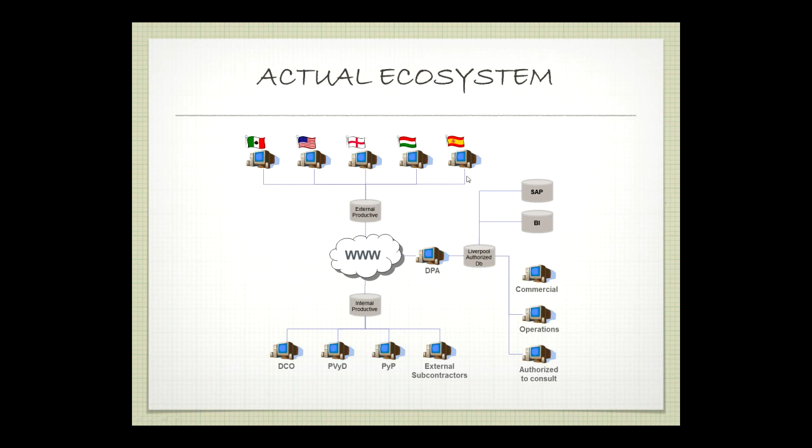Well, for today, the Liverpool Interlomas is our main theme. This was our flagship for 2012. It totals 319,000 square feet in 4 levels of department store, and it also has 4 levels for parking. It includes new concepts like the gourmet world and the human rooftop park, and because of the place in which it is constructed, the facade and the rooftop have a special design, because in this part of the city there are very few people who can walk around.

The main visuals that you always have, it's most of the time directly from a car.

For this project, we had the coordination for the entire project, but 4 companies worked with us at the same time. The one in charge of the interior architecture was FRCH from Cincinnati. For the architecture, all the facade and the internal main area in the center, was Rojkind Arquitectos from Mexico. For the interior design and the gourmet world was Lewis Moberly from London. And for the landscape, we had help from Balsley Associates.

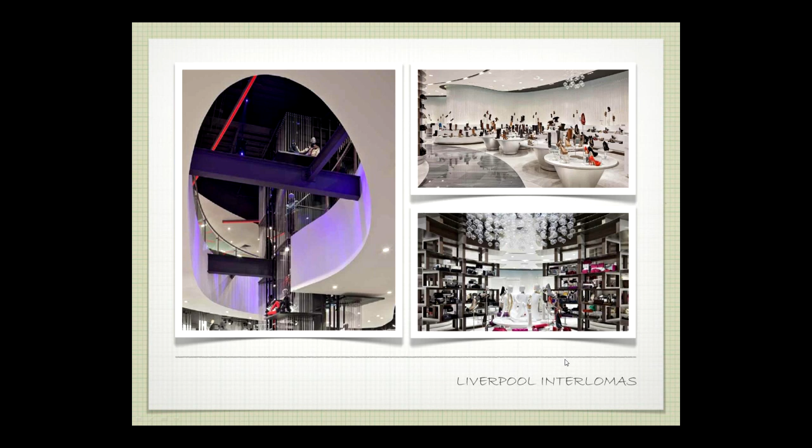And as you can see, these are very organic spaces, and we don't have any problem using ArchiCAD for this.

Well, this is only a main introduction for the project. I'm sure you could have other kinds of questions. I will be pleased to answer them in the future if you want. Thank you very much.

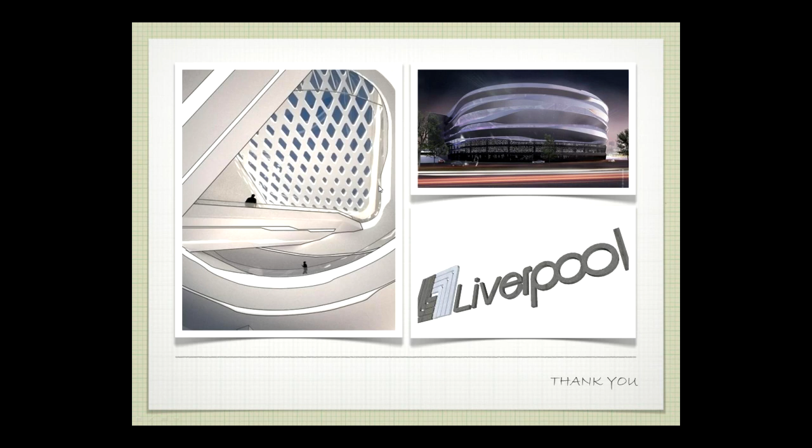Thank you, Fernando. That was eloquent, very well said. Thank you very much for your help and support. I think this is one way of showing how this works, and letting people know that the BIM approach is definitely the way to get all aspects of business involved, because it's a very rich database from which all kinds of actors can take information for their own purposes. Thank you again. Now let's have a look at what ArchiCAD Live can bring us for 16.

Prior to that, I just wanted to let you know that we're actually in collaboration with other people. As you know, Fernando was in Mexico. In Spain, we also have Xavi Ribas, who is in the north part of Spain, in Catalunya. Javier Farratelli is also down south in Seville. And then we have Pablo Gomez, as well as Diego and Paulo Alves in Valencia. Here in Madrid, myself and Jose Juan.

So you will see the collaboration of this work being done live into an actual project, which is going to be the Lomas project, Inter Lomas project, to show the different aspects of ArchiCAD as far as version 16 is concerned, and the new cloud systems that we have for our users.

This is one of the floor plans that we currently have for the Inter Lomas project. As you can see, it's a fairly well interesting area. Now we can actually see the elevations. Those elevations are live, by the way - they're not just elements that you see all over the place, they're in fact building products, building elements that you're going to see taking place. As it is a working project at the moment, at the same time we're having different assistants working through it.

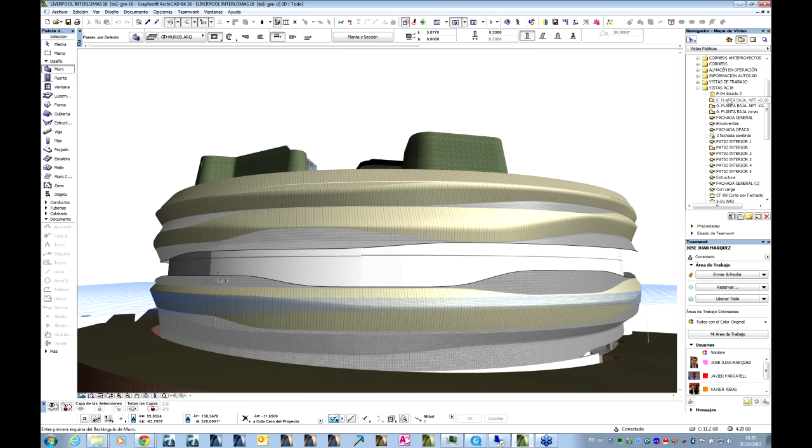And you can see it is a very interesting as well as organic facade. It's meant for those traveling at very large speeds around the site to see it quickly and have an impact.

And here we go, we're going to go into it. So currently these views that we have here will now be shared by the parts of the group. We can see them at the bottom right hand corner of your screen - Jose Juan, Javier, and Xavi, they have different colors. Right now on the screen we can see the blue color, meaning that no one has actually accessed it, and it's free to be accessed, so you can actually select each of these elements.

We're going to see how these elements get selected by the different people. In this case, Jose is going to take all the walls, Xavi is going to take all the columns, and Javier is going to be taking the main grid lines for the structure.

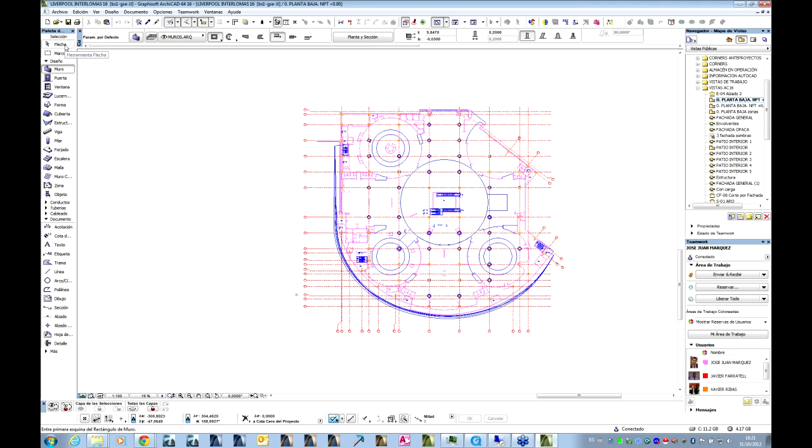So now we see different colors here. The pinkish colors are for Jose, the yellow or orangey are for Xavi, and the rest, which is the structural grid, is for Javier.

So now we're going to have a look at this in 3D and see how it all looks. You can see we've selected all of it. It's live currently, we're simply regenerating at the moment, and you can see there all the areas.

Blue is significant because it has not been selected at this stage, but you can see the columns already, and you can see the walls with different colors.

Right now they're going to be selecting all the reservations, and some messaging is going to take place, like right now in the case of Javier or Xavi Ribas. They're asking for information so that they can actually select their elements that they want to work with.

This sort of information happens to be on the fly. You're taken directly to the area where Xavi's asking for information, because in a large project you don't know where it might be, so you're taken directly to it.

This internal messaging system is live. It allows you to collaborate in real time, and as you can see, it takes very little time to go across. We could simply release it by tapping a button, and it's no longer part of Jose Juan's system, but it will be part of Xavi's system, so he should be able to continue to work.

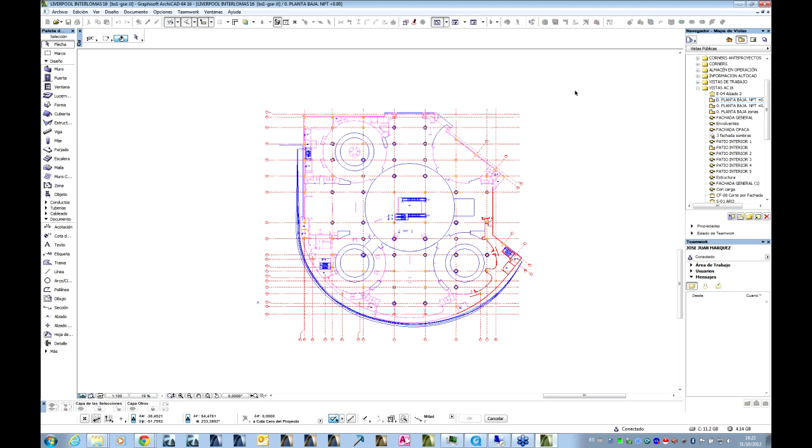As you can see, some areas now have different colors for the walls, and our different assistants are now taking care of their part by selecting and acquiring those elements they require for their work.

We once more see it in 3D just to make it more obvious, and you can see clearly that these elements are being selected as we can see.

Now some walls have turned to red, which is Xavi's, and some elements to Javier, and some elements again in walls and others have also gone to Xavi.

They clearly show who they're from if you put the cursor next to it, and we know exactly who works on what. This is a very important system that allows us to work in conjunction, in collaboration, without having problems of coordination or having any kind of double-doing up and corrupting the database.

Very important. Okay, here we have, this is our part that we're going to be doing, and in fact we're going to be using the new tool Morph. With this new tool we're going to fill in the gap that you see there.

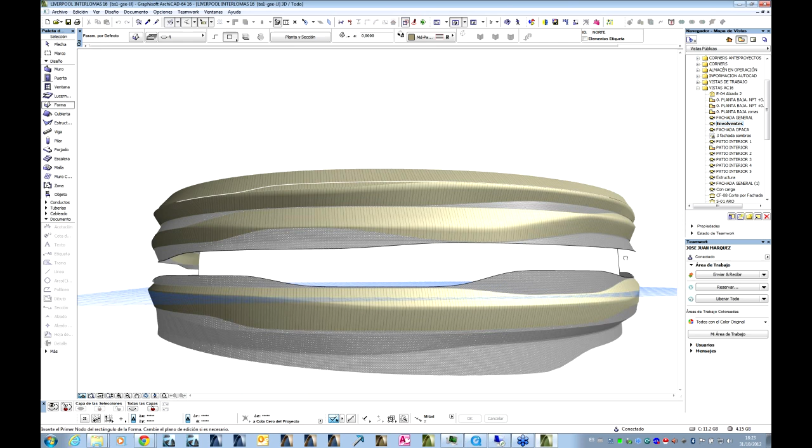Currently you're able to do this because ArchiCAD allows you to put 3D line work in place. That's going to give you a guidance for the new form. It's in the wrong layer, but it doesn't matter, so we just switch it on, and the Morph system starts working. As you can see, it checked out all the line work, and then with these edges generated the form that we see here. It's quite nifty.

As you can see, it allows you to go from the macro, which is in this case the building, towards the micro, which we'll show later on for the furnishing of some parts of the store.

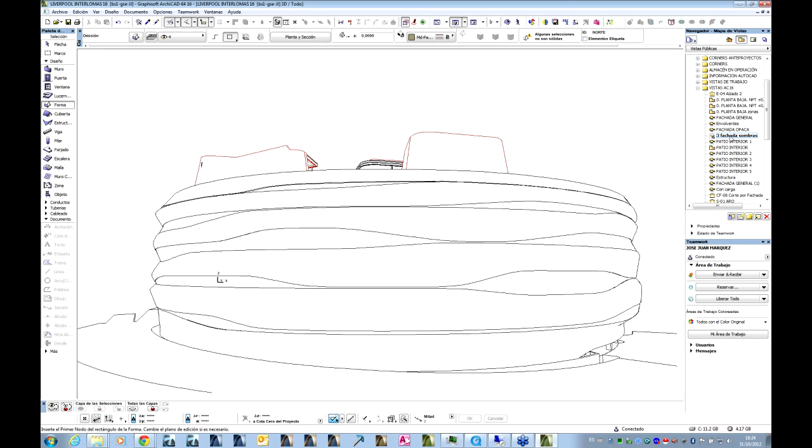They're real, they're like we have built it. We can see it in different colors, as you can see for this representation. So it is, after all, an architectural representation.

It's not just a mechanical one. We're able to select how and which way we see it, but we can always work in every part of the database, that is, in all the windows, be that 3D, sections, elevations, and details.

This is a 3D element, and in fact it's going to show right now that they are real. You can see there it has some form of information because it is an intelligent object, and again we will see other areas of the building so that you can get more acquainted with the interior of this retail store.

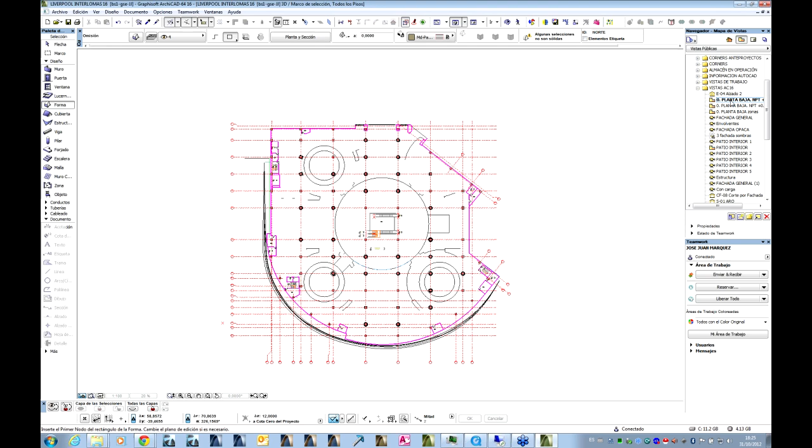At the moment we're going to see the well that takes up all the vertical circulation, all these escalators that we have there, and further views beyond, just to give us an idea of the complexity of the building internally and how easily it's able to be provided with the system that Graphisoft has done with ArchiCAD.

You can see very well that all these different people have actually got information. They can send and receive all the elements that they wish to. All the colors have been assigned, and what we're going to do is acquire all the information. This is going to take about 30 seconds at most.

We have to remember that the server is currently located in Paris, that we're working from Madrid in conjunction with different people around Spain, and that we're able to get all this information across to you live via internet. So the system has to be very efficient, very fast.

And here you are. You're able to see all the changes taking place, all the new things that have been added, all the additional information that has been done. And here we have a report from our different assistants and collaborators saying that they've done their job. So you can imagine, as a main executive officer or the person in charge of the project, you know exactly how far things are going along.

But of course, this is all well and good. We have all this information that appears to be as in 2D, but in fact we need to be able to collaborate with other assistants or collaborators or consultants. In this case, we will be looking at how this turns into structure.

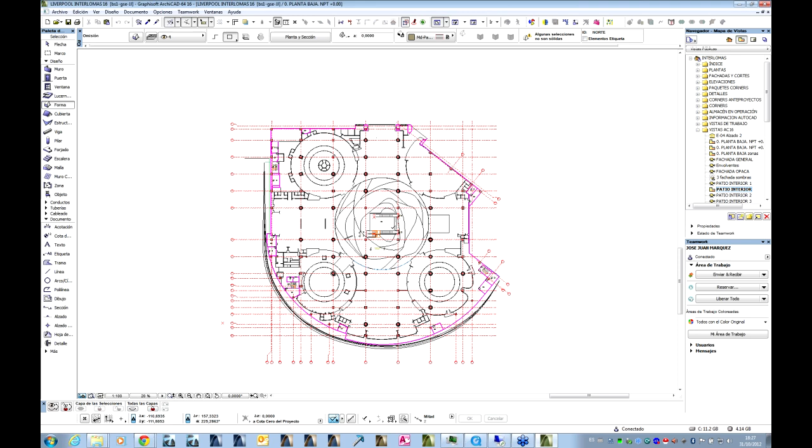In order to get a collaboration done, we will have to start thinking about other consultants. We're looking at the moment at the wells from a plan view, and now we see it again from a 3D point of view. But the interest here is not these two images, but what comes next. What comes next is going to be the structure of the entire building, which is going to allow us to view it from a different point of view.

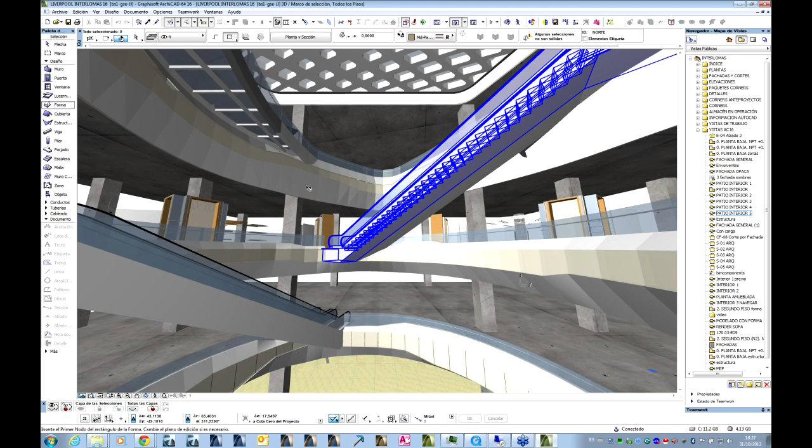Different users or different agents involved in the production of the project have different needs. And here's where OpenBIM, with its inclusive system of support in terms of exchange of information, can allow us to connect with our different consultants or collaborators, be that of any kind. As you saw from the ecosystem in terms of Liverpool, they actually have it even dumped into their SAP ERP.

Each of these elements, as you can see being highlighted, are construction elements. Even if these elements had been done in a different system, we're able to import them into ArchiCAD and then further work on them so that we can continue to modify or change them. Therefore, it's very flexible.

And here we are. We have the structural componentry of the building. What we have to tell it, though, is what it is that we want to send to our engineers. It is quite important to ensure that we send them the correct information so that they don't waste time, and there's no redundant elements that they don't require.

So we're going to specify in this area what sort of elements are taking loads, so that they're actually what they want and not just some fancy 3D geometry that is not required.

Once we have done this, we will then be saving this as an IFC file. IFC, as you probably know, is the Industry Foundation Class System. It is important to note that it's universal, it belongs to no one, and the beauty about it is that it's a simple file system. It's in fact a text file that picks up all the information relevant to the BIM model, not just its geometry but all its cleverness in terms of what it does.

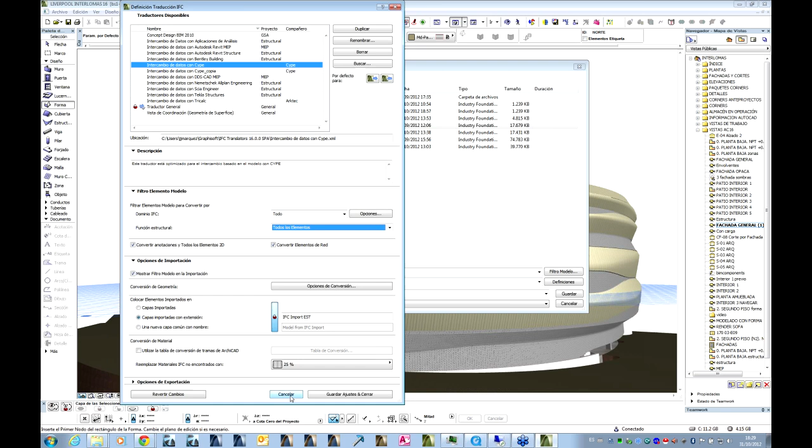We're able to save this by selecting the elements that we need, and at the same time using translators that we already have in Graphisoft for different software vendors. In this case, we're going to be sending this to CYPE Engineers, and the beauty about it is that all of this can be worked out so that the protocols in terms of information exchange are clearly defined for all kinds of elements.

We're able to then ensure that what we have is information that is valid. But when we produce these drawings and sections, because after all this is what we issue to site, we note here that most of the elements are intelligent in terms of being able to clean up. They do not double up in information listings or quantity takeouts because it's clever enough to know that it's inserted into some other element. You can see also that the envelope here has actually been cut correctly.

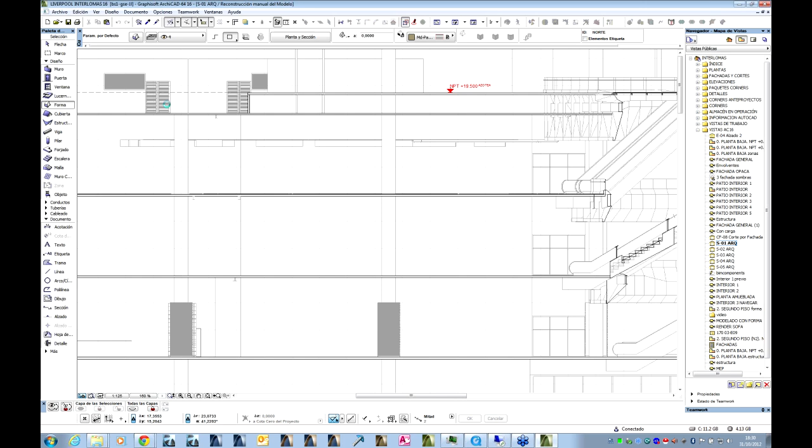It actually joins very well. Elements such as escalators or stairs are clearly defined.

That's going to save us a lot of time in drafting. In fact, we do not draft anymore. We take this information directly from the model and simply add further information as we need, whether details from the manufacturer, or 2D information referring to text or dimensions. But as you can see, we don't need to draft.

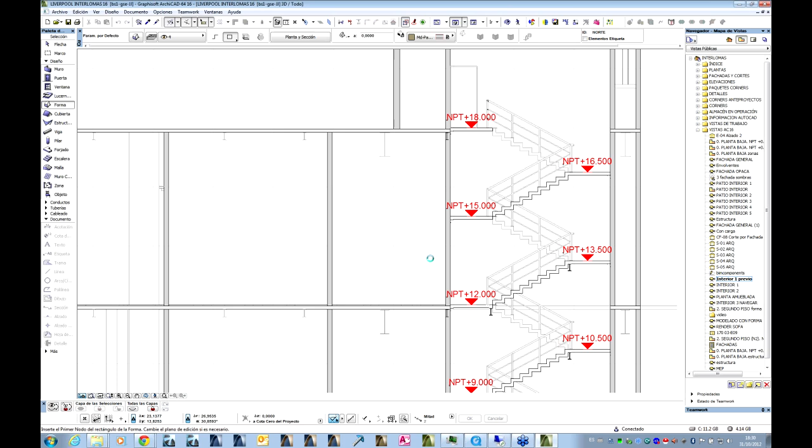These are real elements, we're actually building them. All the cleverness in terms of having the levels, the elements, and being able to list them out is all in there. It can be used for any kind of simulation, which we'll see with CYPE Engineers, even for fire engineering, to check how an evacuation system will work should we have a fire developing.

But this is the beauty of BIM. We're able to have a lot of information that different people will require, and it's not always the same.

Here we are on the second story level, which has been furnished for the purposes of this presentation, and some joinery elements have been put in place. We're trying to show you some information, but unfortunately the internet is a little slow. Nonetheless, you can see from an overhead point of view the way the story has been shared into three main nuclei around the main core of the vertical elements, and that will let us show you how we can travel through this building or floor for many reasons.

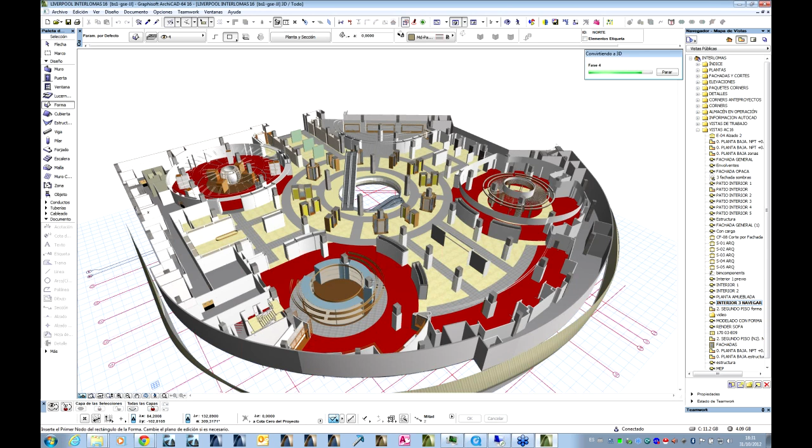We're able to understand how the shopping mix is done in terms of retail expert. We're able to get salespeople involved in how to best display their information or take advantage of this for their clients. We're able to do marketing from this. We're even able to share this information for building groups, for clients, or for us ourselves to analyze and study.

Now, this is within ArchiCAD, but of course we're able to do so through BIMX. BIMX is that particular tool, which resides in the cloud as well, that allows us to package information in one single executable file that can be used by either Macintosh or Windows.

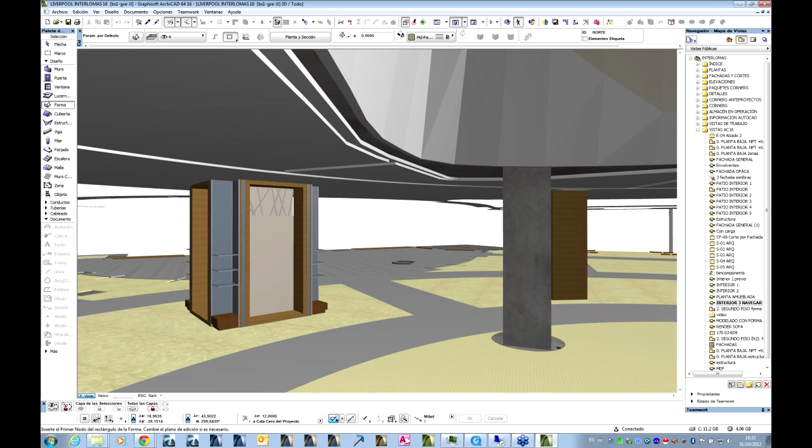It's able to give us intelligent information that we can query, measure, check. This is interesting because if we send this information, it can be modified later on and simply sent back if needed, in case we're going in a development mode with the project, and that is at any stage.

So here we are, we're going into the area we're looking for, just to show you from a micro point of view what the actual element does in terms of morph.

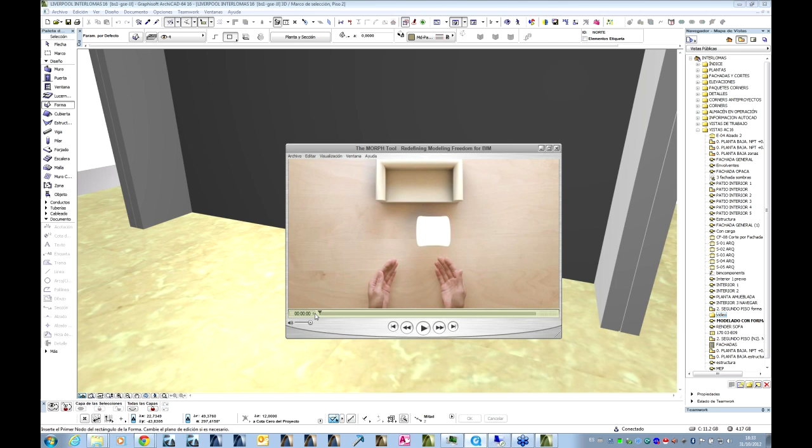Before we show you how this works, we're going to take you into a video. That video will show you the essence of what we're trying to do. This is purely from a show point of view, but what we're trying to demonstrate is how it actually works within ArchiCAD. This is the premiere of it. We want to show that it works such that it's simple, intuitive, makes sense, and is something we're used to.

So here we are, we see somebody drawing a little shape. In this case, it could be the size of a sofa. It is a curved block that can then be changed into whichever way we want, because we have some auxiliary systems to help us push or pull areas or polygons within that block, much like SketchUp or within ArchiCAD.

And of course, we end up at the end of the day with an object that is in fact intelligent, a BIM element. These extrusions have been made around the backrest of the sofa, and then we continue on so that we're able to get another shape representative of the cushions placed on the sofa, both the sitting and the backrest.

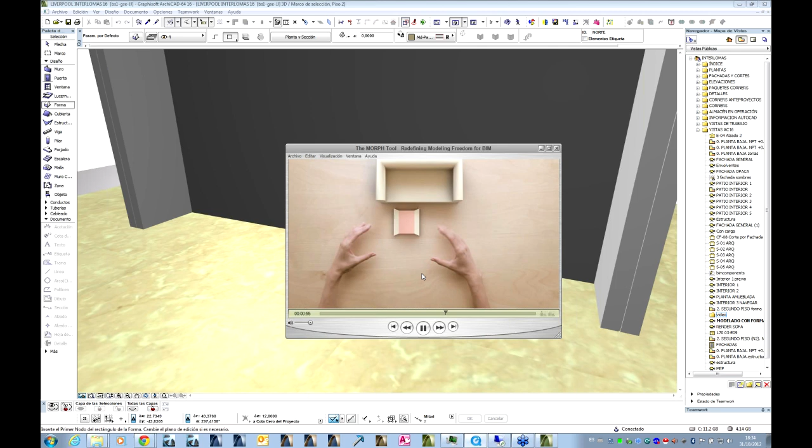And as you can see, again the same process with some auxiliary elements, some ways of changing it so it becomes a double-edged system, so there's no reason we cannot have double-curved elements as shown right now. The copying of it is simple enough, the idea of being able to copy this and then shift it in terms of its rotation, but it has to be simple. So this is the principle of it.

This is something that we'd really like to say that we have actually captured. At the end of the day, this has to be shown somehow, and we can select a number of textures, or finishes, that can actually be applied to the sofa at the end. And this is the end result.

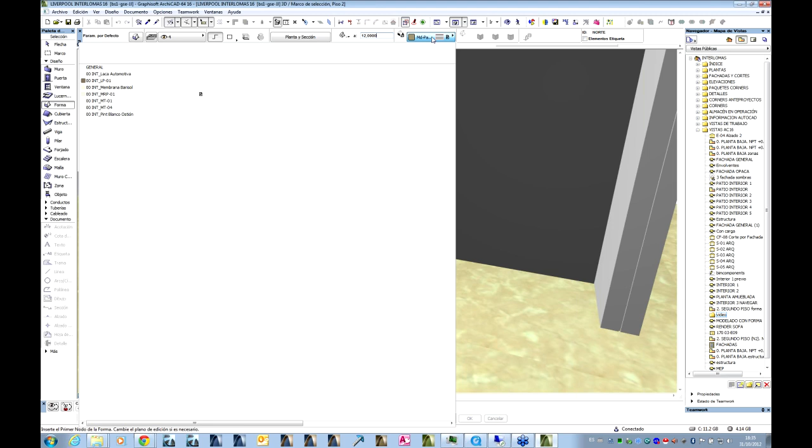Our intention here is to show you something similar to what you have already seen, more than anything, so that you can understand that what we put in that video is in fact true. We're going to be selecting some materials first of all, just to make it more visible.

We're going to be describing the base of that sofa through a polygon that you can see being represented right now. The beauty about it is that you can see some pet palettes. The pet palettes that follow the cursor, or actually stay very clearly in front of you on the screen, allow you to do all kinds of editing, including precising and mentioning any kind of distances that you require.

Here we have isolated it so it's easier to see, and we're going to start, as you can see, from the top in the middle of the pet palette, being able to modify this by pushing it up a certain distance that we already know is about 70 centimeters.

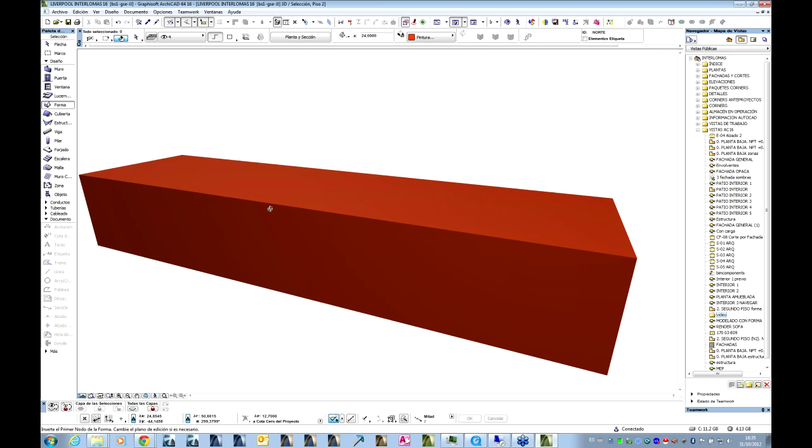We're then going to be able to get some divisions within any of the edges, so that it helps us. We're going to pull out, if you like, an auxiliary line. That's simply going to help us define an internal polygon that you can see here.

Now the intention is that we can then push that polygon eventually and create, if you like, the main carcass of the sofa.

So we have two main side lines. We're going to get the rear line at the moment. As you can see, there are some divisions being made there because we wish it to, so it makes it easier for us to do it quickly.

This is the beauty about ArchiCAD. Whilst you're doing something, there's no changing of commands, there's no changing of program. You simply continue working on the fly.

Here we are, we have described another element which is going to push down a certain distance, which we already know, and the intention here is to create that carcass that we're talking about. Here's the base. So we have finally finished the base within the last few seconds, and at this stage we're going to start thinking about the backrest.

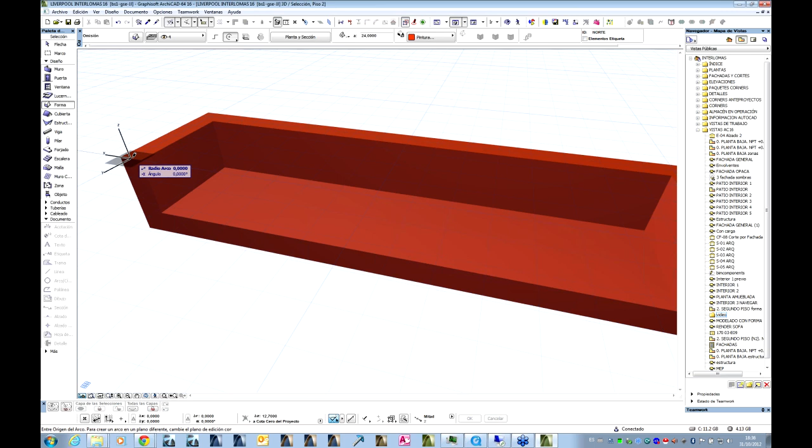The backrest is made again by pushing out another polygon. This polygon happens to be a circle, in fact, and it is easy to shape it and to turn it.

As you can see, it is intelligent enough with the cursor so that we have information on the fly helping us navigate, at the same time being able to change points or locations so that we can extrude and move along with no problems. Here we are, we're changing at the moment the height of it so that it's easier to push it along that edge.

We're then selecting a point from which we're going to be able to extrude it right along the edges of the backrest of the sofa.

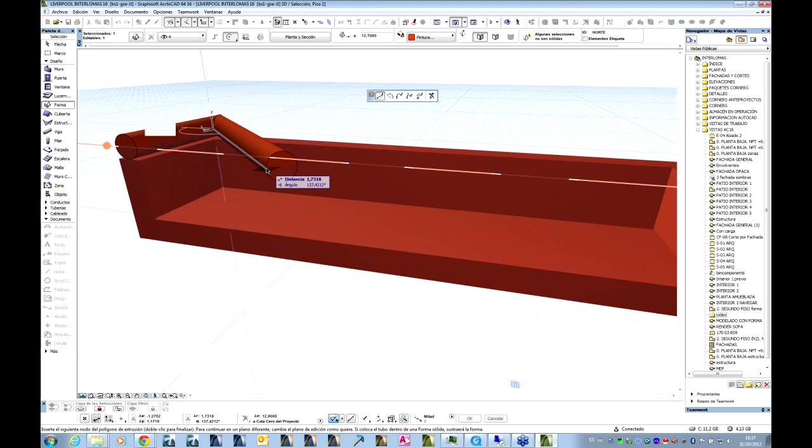And here we go. We already see the first part being made. The second part will shortly be done. It's a little slow here on the internet. That's okay. And again, we come back and we finalize this shape.

Now that we have that extrusion, we will simply put it in place so that it actually looks like the sofa that we want to see. Here we are. It's in position.

Now obviously with morph you can have many elements, or you can make many elements one element, and this is something that we're doing at the moment. But the beauty about it is that it's still only one element. It has taken out whatever is excess. So as it is now being highlighted, you will probably see that it's all one element. Again, for takeoffs this is extremely important because we don't want doubling up of measurements in terms of quantities.

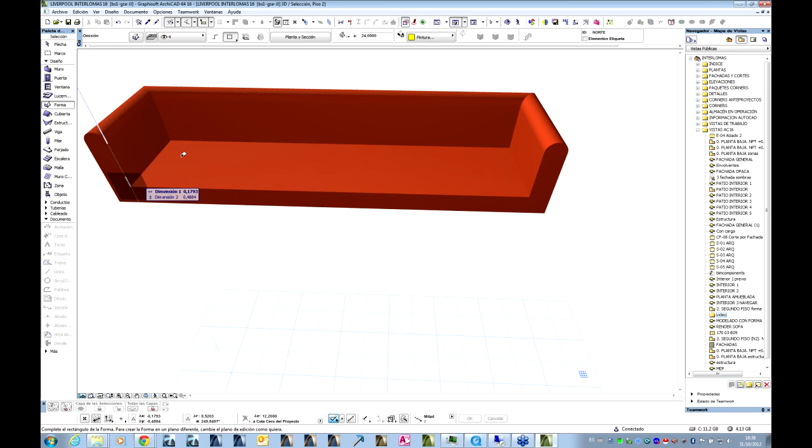What we're going to do now is simply place down the first of the cushions. Because we have already divided in here into 4 places, we know that it fits 4, because that's what we selected. There's the element there. We're going to push it out so that we can have a better look at it and be able to work with it. It comes out in a second. And beyond that, we're going to start thinking about softening that polygon so that it looks like a cushion.

As you know, cushions tend to be soft and have different curvatures, and this is where the game comes in. We no longer have to construct something in a mesh, which becomes very difficult to handle. The 3D aspect of producing this is very simple because we have a lot of online help. The roundness can be suggested in terms of smaller segments, so we have a better curve, and beyond that we can extrude it so we can have a cushion the size we wish.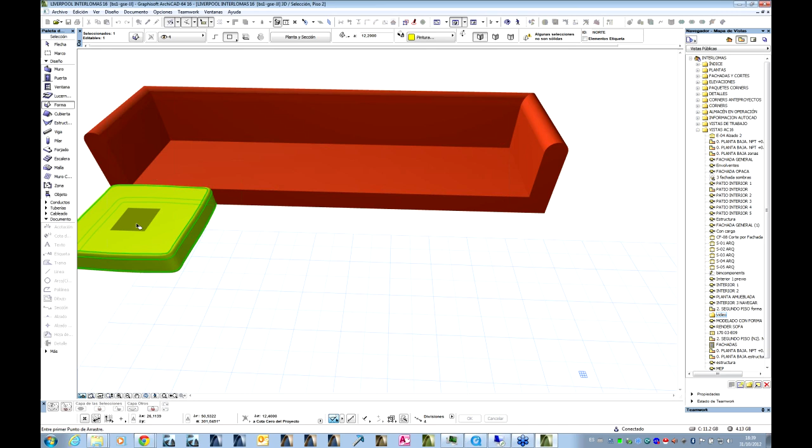Once we've done that, the chamfering of all edges can be done so that we have a double curve, both horizontal and vertical, and here we've selected just a simple curve. Once we've done that, we can push it back into position, just shy of the back.

The reason for that is we want to copy this cushion as the backrest for our sofa. These systems we currently have, as you can see with the protractor being shown, allow us very quickly and simply to relocate it in the position we need and locate the point of fulcrum, or in terms of rotation, and then be able to copy this seater to the rest, or the backrest.

At the moment the internet is a little bit slow, but we'll get over it. Here we are.

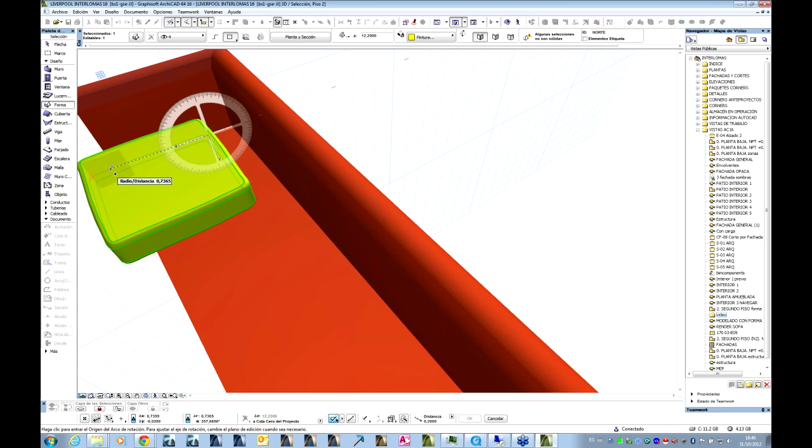We have already curved it, and we selected it and simply shifted it across that axis, and as a copy we have these two elements.

Now the backrest has to have further shaping, and we're just going to shape the top of it a bit so that we can give it this cushion look rather than just a solid, as we currently have, so it looks a little fluffier. At the same time, we're going to push out a bit of those surfaces to give it some depth. We can do as much as we want, but we really want to do this in a measured way, so we'll select a distance that we want. And again, we'll do the same for the seater.

It's very, very versatile. We can shape it much like we were doing anything organic. It's going to let us remorph anything we like.

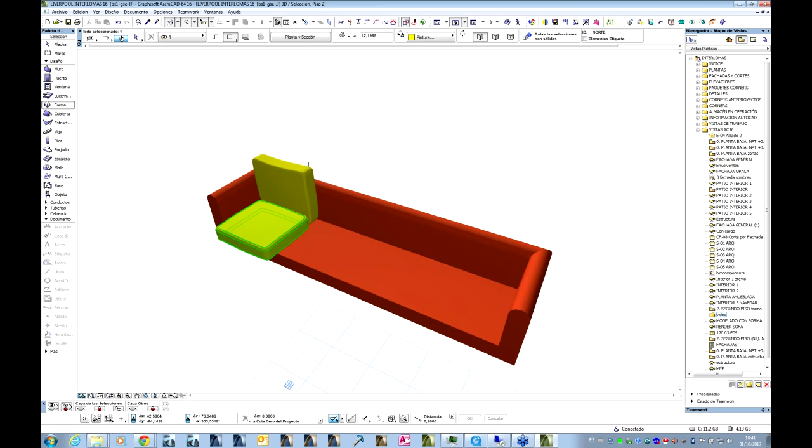Once we have these in position, we can copy them across with a very simple system, as you can see, and just set the number of copies done across the element. We're going to do 3 elements across a certain distance, and when they're correctly divided, here we are - we have the 3 additional seating cushions done.

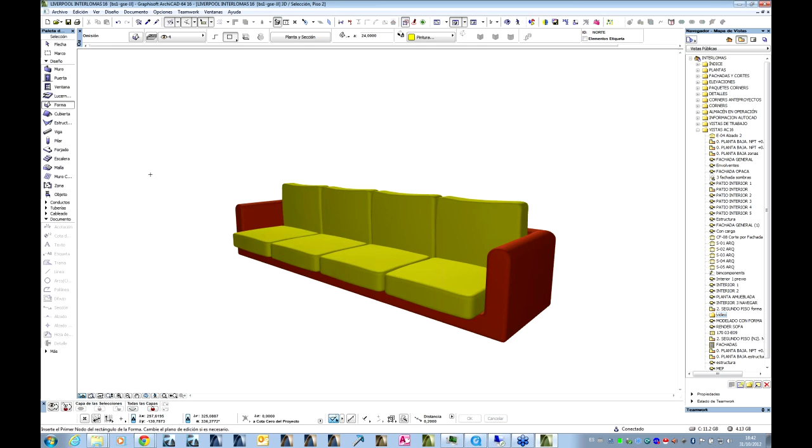Once we've selected all of this, the carcass can also be turned a little bit. It's a bit harsh on the edges, so we're going to chamfer all of those edges to make it look a little more comfortable, as if it had been cushioned. This is again done simply with the click of a button, so we can get our information across. See, it's already been done, it's been taken care of, and it looks rather nifty.

Now, of course, this is simply a color scheme we have here to make sure we see the differences. What we need to do now is give it a finish.

We can select a number of materials. Here you go - in this situation it's a cloth material that can be placed in the location where we want it, because remember, we actually cleared it out so we could see it better. And we can even render it so we know that it looks okay.

This render is going to be useful for us later on to show you how the BIM components portal works in terms of uploading this information that can be shared with either consultants we have or the public at large, or we can even be nifty enough to start producing these elements for manufacturers who can then have their wares exposed in this community portal.

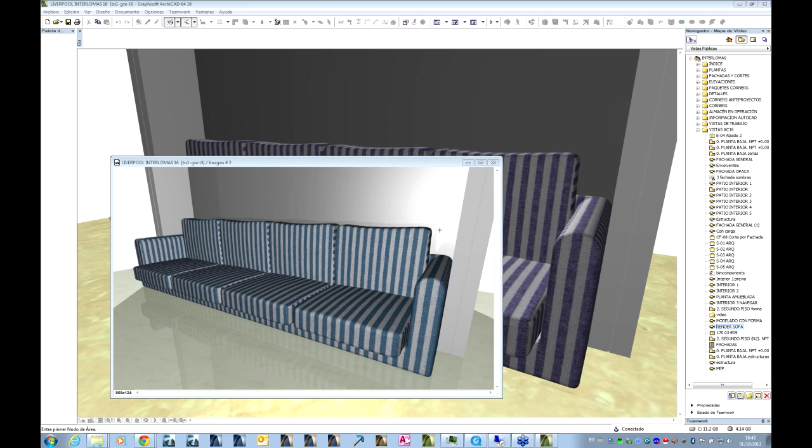We're going to start thinking about collaborating with engineers. For that, I need to first go through, like we did with the video, the steps that we take and why it is that we've done what we've done. It's very important, because we need to ensure there is a smooth workflow structure, that it is applicable to everybody, and that it is platform independent.

So the first thing we have done is create the architectural model. Here, we've done it with ArchiCAD. Beyond that, we've actually filtered and classified the model. In this case, it's going to be for the engineer in terms of structure. We then export this architectural model as an IFC file for him to pick up.

Once we have selected the file from him that is being worked on, we can reference his model onto ours. The reason is simple: there's proprietary work taking place here, and there's also liabilities that we have to work out for, and nobody wants to have their model touched. This way we're able to systematically check for coordination and ensure manipulation of changes so that we don't get lost. At the end of it, we can also coordinate all of these elements within the architectural flow.

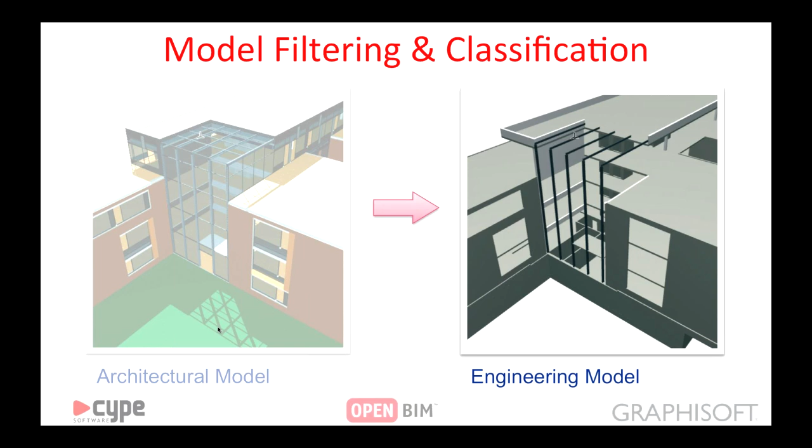It's interesting to note that different actors or agents within the process of construction, or using the building, see things differently. In this case, the engineers do not see the same as the architects do. What they see are elements that take structure, that need to be calculated, and that are going to be supporting the building. So we have to take into account how everybody else sees that central database. It's important to understand that the reference model is going to join these two, so that we are able to understand what each of them sees, but at the same time it interfaces clearly with what the architectural intent is.

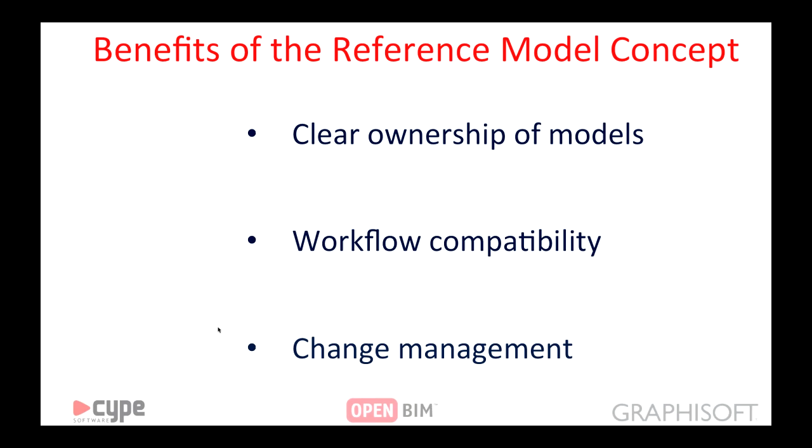Beyond that, we have to clarify what the benefits are in doing this. As I said before, there's clear ownership. It's important to see that everybody knows where they stand, that there's no messing about with their model, and that their liabilities are clearly explained. The workflow compatibility is maximum because there's only one system, one file that everybody picks depending on what they need from that central database. At the same time, change management is very effective. All of this gets recorded, obeying ISO 9001, because beyond now, we will probably have to ensure that everything we've done gets recorded for later use in terms of management information and data management.

So here we go. Some people described IFC as just simply a container of information that's dull, that has no need, just a repository, when in fact it is a better system. It's a system that, with some intelligence from Graphisoft, is able to let us know all the elements that have actually been added, deleted, or modified, and this doesn't necessarily mean structure, it could be anything else. So this framework has to be required and remembered, that everybody is well introduced, that the protocols of exchange of information are clearly stated, and therefore we will have a successful project at the end of the day.

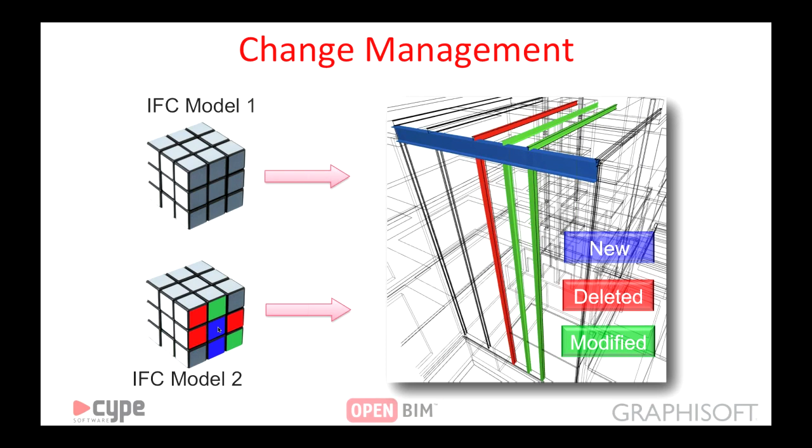At this stage, I'm going to start talking about the actual demo. We're going to switch over to CYPE, and CYPE at the moment will be picking it up, so it's all over to you guys. Please explain to us how you work and how things take on.

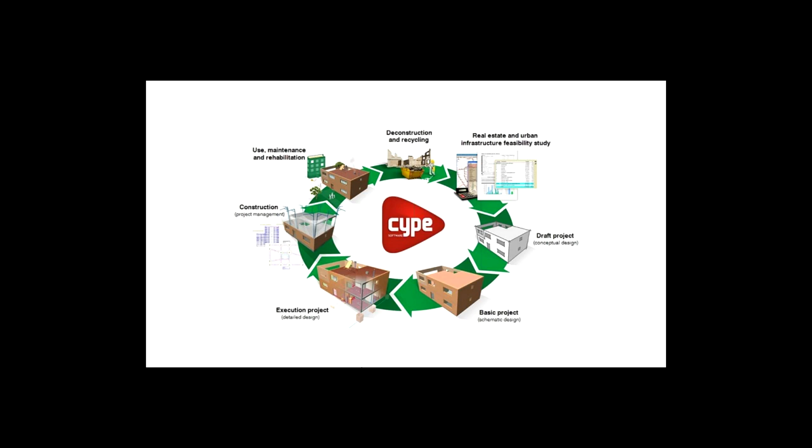Now, with this graphic, we can see the lifecycle of the building. Around this process, we can use our software in any case, so we come in at any state of the building. Right now, as you know, we are an open BIM environment. We are going to use part of the information from ArchiCAD in our programs CYPE.

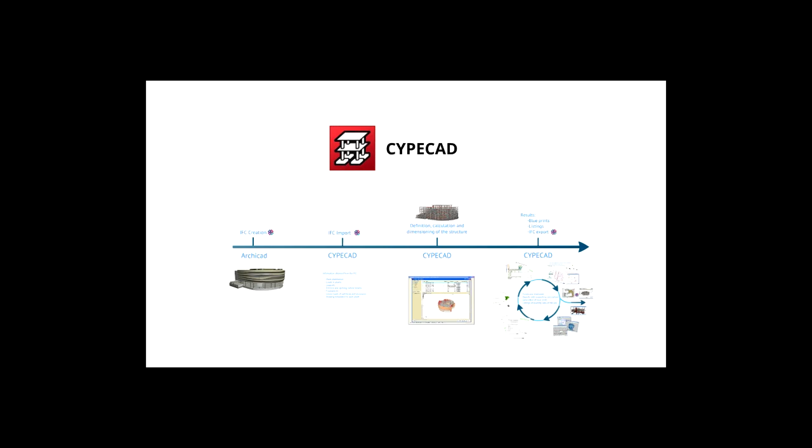Now, in our program, I like to always talk about the software, because any software consists of 4 parts. The first part is the import, the second part is the introduction of all the elements of the structure, for which we are going to use the 3D format. Then we're going to do the analysis. Finally, the last step is going to be the calculations, job reports, and drawings. I'd like to mention that not so many software around the world do these 4 parts, especially the drawing—with just one click, you can get all the drawings from any kind of element of the structure.

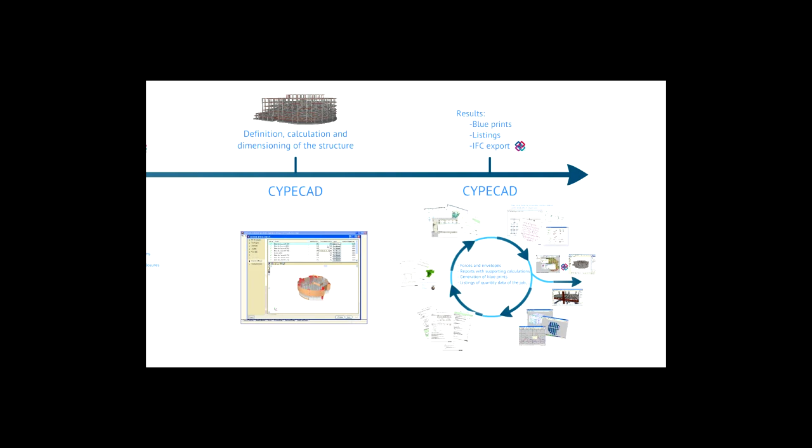Now we're going to see part of the introduction of one of the single projects. We are going to import the 3D format, a 3D view.

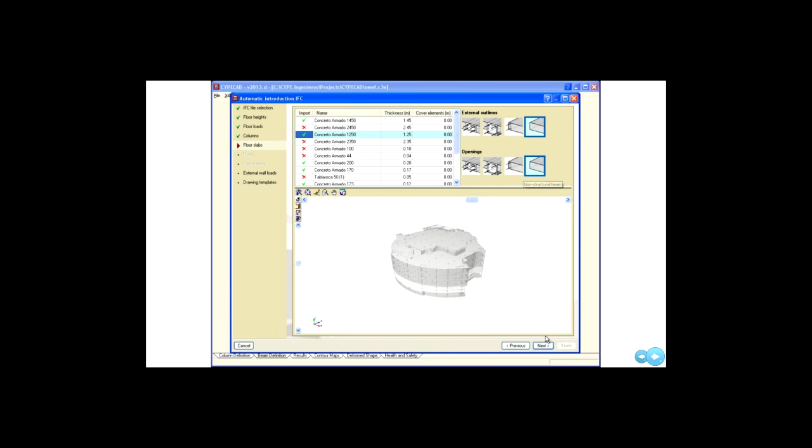So this is the external walls. Now, finally, we're going to do the building codes. We are located in Mexico right now, so we're going to do it for Mexico. After that, we're going to do the wind load for Mexico.

We pass into the tributary width in X and Y, and then the seismic load. Again, we go back to Mexico. I'm going to introduce the number mode. We run 3 by floor. In this case, I'm going to set it to 30.

And then we can see the 3D view of the entire building. Now I'm going to show you, we can travel around the floors. Now I'm going to show you just how to generate small elements like a beam on that part of the building. It's going to be a metallic one.

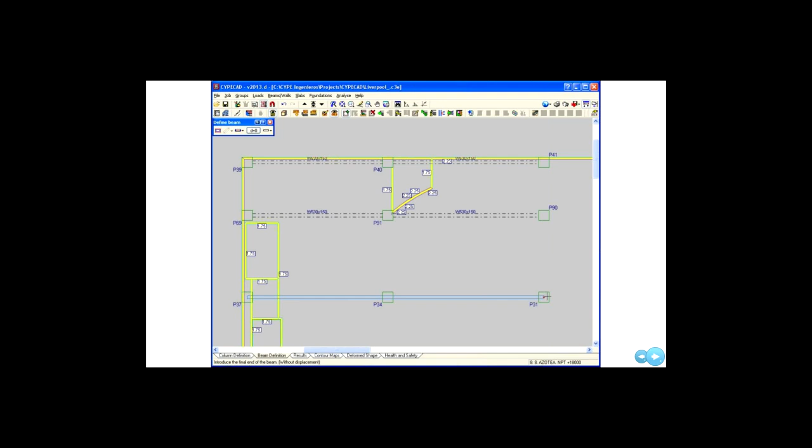We can also choose one from our library, and you can create your own library. In this case, we're going to do the W and different profile. We go column by column, and later on I'm going to introduce and activate one of the DXF files to help me finish the job.

And then we are going to do the slabs. In this particular case, we are going to do the steel deck. We can create our own library here too. Once we finish with that, we can run the analysis. One more time, the 3D view.

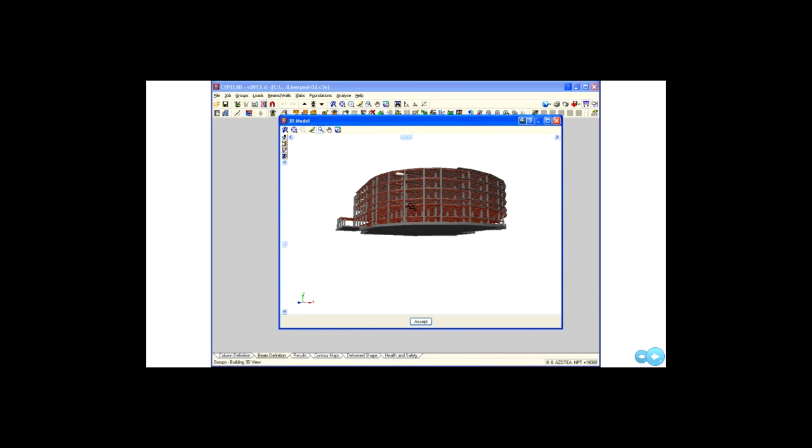Now we can select the materials. In this case, the concrete and steel. You can see the differences between one another: that's the metallic one and the concrete. Now the analysis.

This is the column editor, our column editor. We can generate reports about all the columns. These are the drawings: joints, stair walls, and one more time we can generate these for ArchiCAD. I'm sorry. You see the quality of this importation is really nice.

And now we are going to talk a little bit about the program CYPECAD MEP. We can do this program in Spain. If you are located in Spain or in Europe, you can do electricity, light, heating, acoustics, all of them. But little by little, we're going to introduce some of these programs in South America especially. I know that in some countries we can do gas, fire, and acoustics.

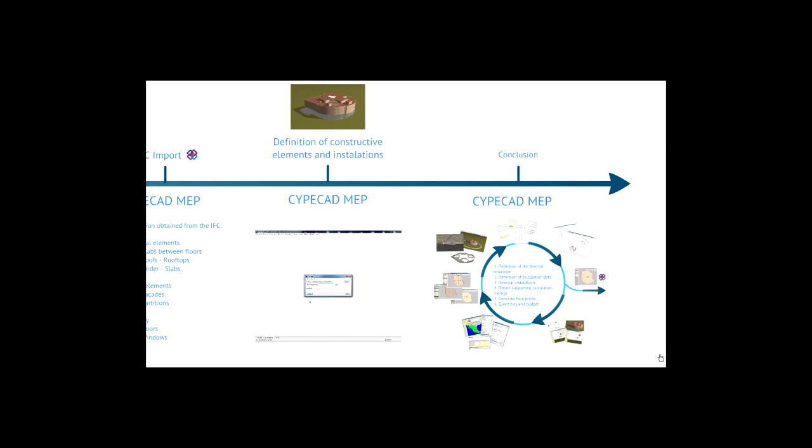Okay, once more. We are going to introduce the IFC format. In that format, we can recognize the horizontal elements and the vertical elements. This is a way to introduce one job into our software. We give the reference, we can choose the air conditions, and now we're importing the template into our program, the 3D view of the structure.

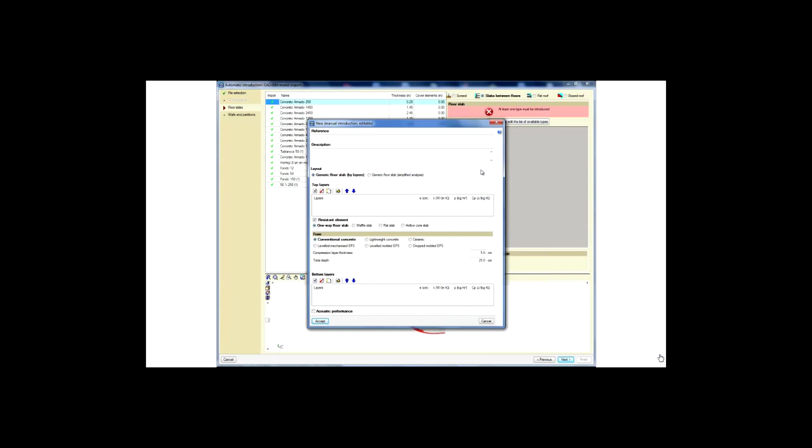And now we're going to do the floor slab. You can do it with generic ones, but you can also use our libraries. We're selecting one of them for floor slabs, even for internal walls and external walls.

Then the type of the building: it's a commercial area, a mall, and we are going to do the air conditioning. For the high floors, we will check our own conditions. Now we're generating the site climate data and the sun light or shadow light.

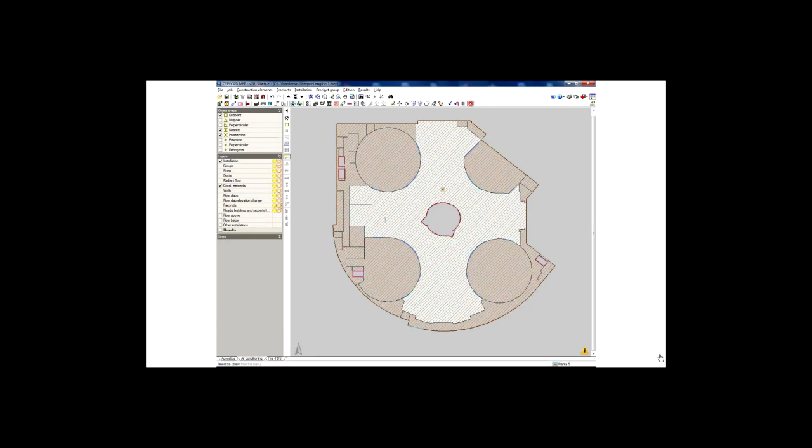Okay, now we can use the IFC format to introduce an enclosure with just one click. So we'll go for circulation, and we can run now the analysis. Okay, we choose the area. Now we can see if we want to introduce our conditions in that area, and we can generate the heat loads for every enclosure, the chart reports, the hourly evolution, and annual evolution.

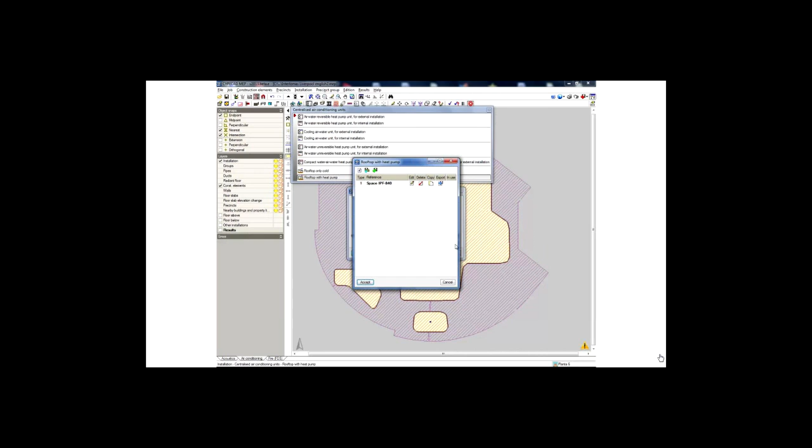Okay, this is one of them. This is the heating, ventilation, air conditioning. We're going to select part of the system. We are building just a net.

Once we finish with the net, we can run the analysis. Now the program designs automatically the installations under the criteria of the ASHRAE Society, that means the American Society of Heating, Refrigerating, and Air Conditioning.

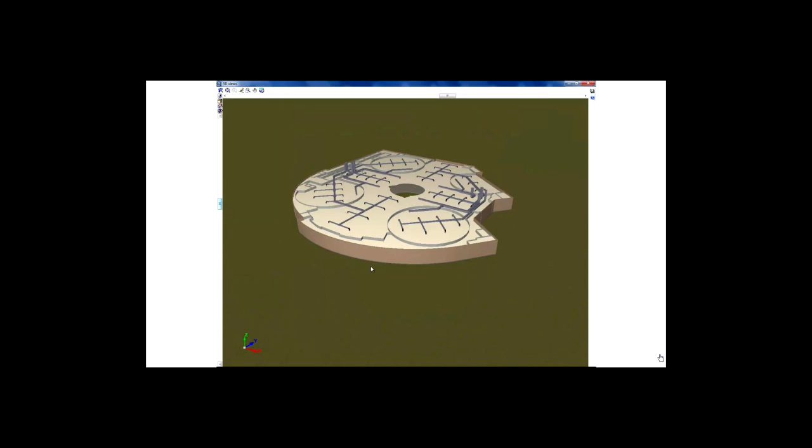Now the 3D view about this part, the job reports, you can see in detail, you can navigate inside the structure, and the job reports. Very important that we can export that to Energy Plus. See details about the drawings, and then the Energy Plus.

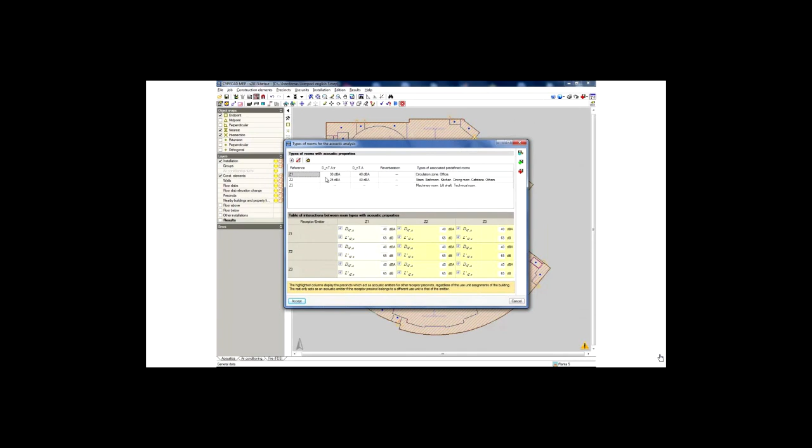Now we're going to do something about the acoustic. We go by normative in every country. It's very quick. You can generate the analysis, the full detail, the documents, the report, all the formula, very clean.

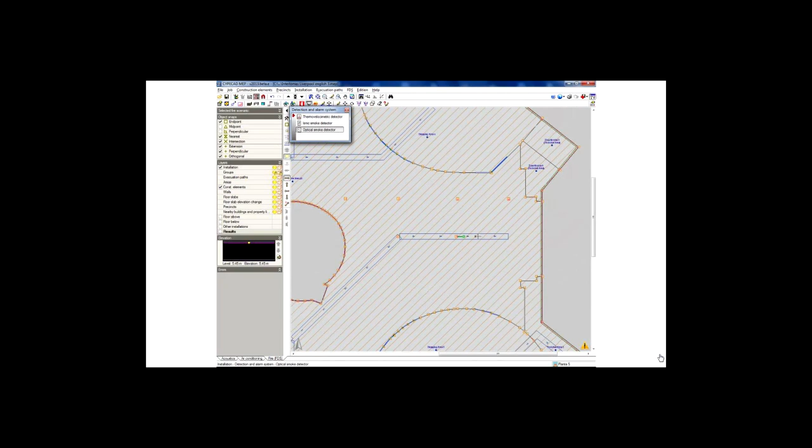And then we're going for the heating and the fire. This is a simulation installation, this is our installation. Now we're going to generate some load and the optical smoke detector. Finally, we're going to run the analysis, the simulation analysis, in that specific area of the building. As you can see, we run the program very fast, and the evacuation, smoke evacuation is going to be optimized.

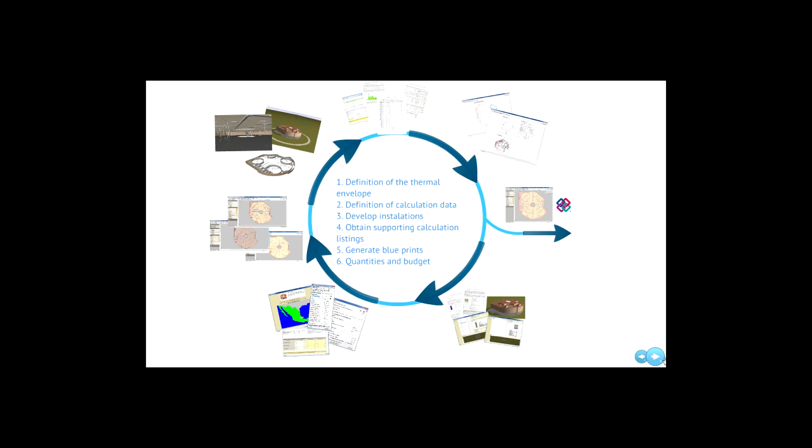And finally, the exportation in ArchiCAD. So this is a resume about the process. We generate the 3D view, the reports, and we are using the library, our library, the locations, part of the DXF files that we are going to use, and also the 3D view, even the shadows, the chart reports, the 2D and 3D drawings, and one more time again, about how to export to the program ArchiCAD, and that's all. Thank you very much for your time.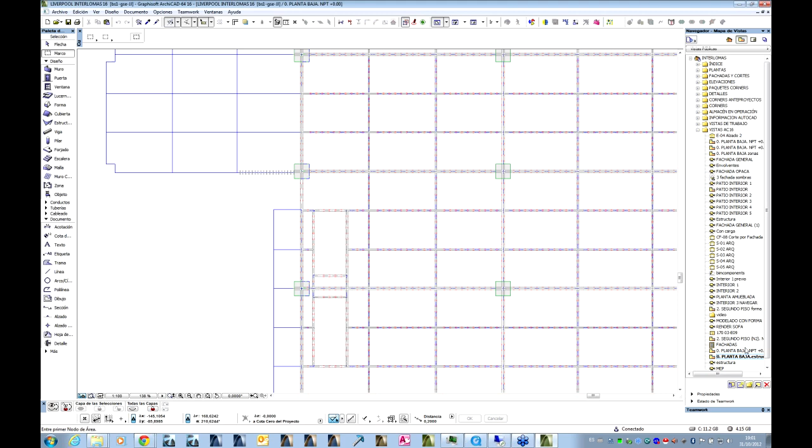So at this stage, we can see now a main interface. This interface is going to let us choose the initial element that we send to the engineer, which is again an IFC file. We will then select that particular file, say OK, and then continue on with the comparable file that we have to do against, and that's going to be the one sent by CYPE.

As soon as we have that information, we're able then to start asking it to go. We have several ways of going through. We have translators that obviously are narrowed down to each specific software vendor, and a right grid coming up in a second.

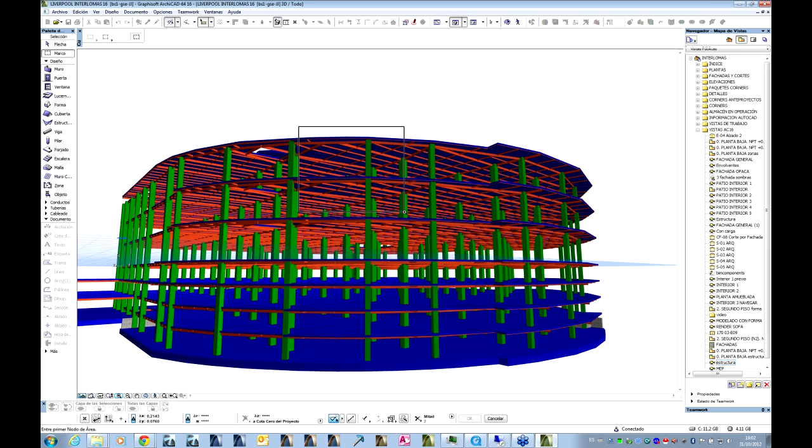At this stage now, we're going to be looking at the MEP set part of this, and the reason for it is just so you can see it involved or mixed together with the architecture. Again, it's a similar system, we simply pick up the file sent to us by the engineer. It then gets inputted directly. We will choose the way we want, or what it is that we want from that IFC file to come in, and as soon as we have that, we then say for it to go ahead and show us.

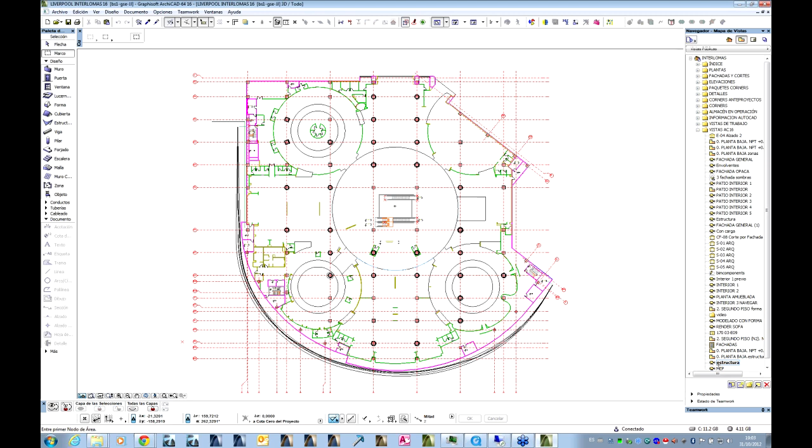It's going to come up in a minute. Obviously we were here in terms of the structure, but very soon we will see what the influence of the AC system is like in our floor. Here we go, it's all in blue, light blue, as you can see, and it shows us very clearly what it's like. So we can start checking for clashes. By the way, MEP in ArchiCAD does the checking of clashes against structure and architecture, and we would be able to very quickly ascertain whether something's right or wrong.

Again, we mark it up, we can send it back to the engineer, or we can simply adjust it and tell them that something has to be looked at. So here we are, we have all this information coming through. It is quite a good setup.

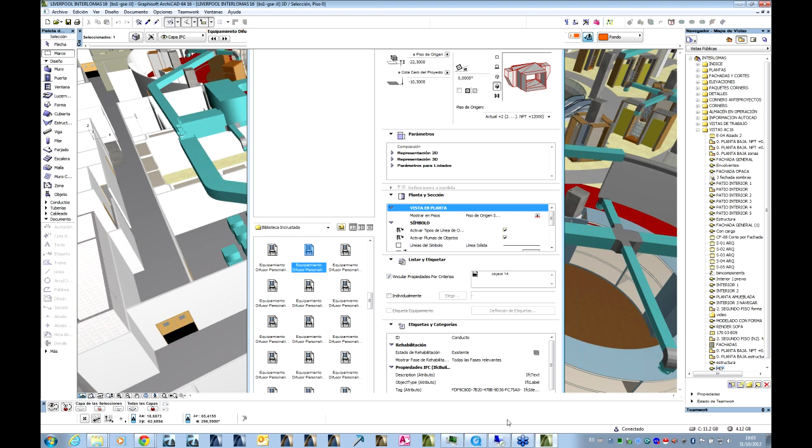We're able to acquire all these elements in original ArchiCAD map elements that we can continue exploring if we have to, or identifying manufacturers that have been used for the cooling systems and the like. Right now, I'm going to change my screen so you can see what happens with the

uploading of the information to the portal of BIM Components. Now, in this case, we know that ArchiCAD off-the-shelf comes with a lot of objects. In fact, it comes with over 1,000. And if you look at all the permutations, it could even be more than that. It's thousands, in fact, because there's lots of them. It's probably about the best that we can get.

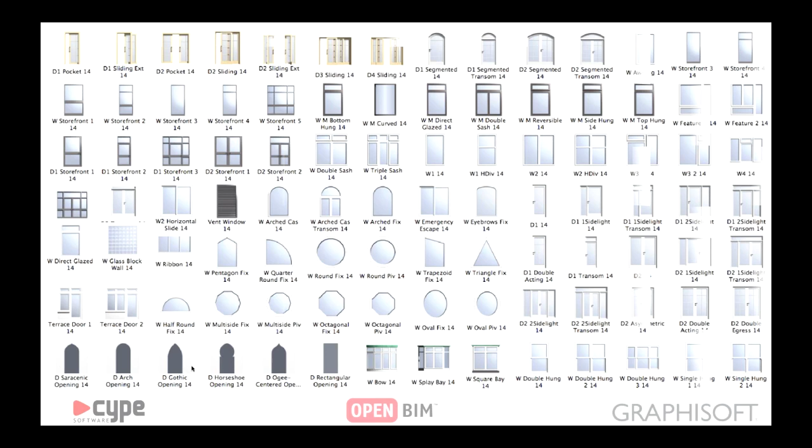However, in each of the projects we need specifics. Right now, with 16, we have very specific equipment elements coming up for hospitals and the like, as well as us being able to include further special designs that we want to customize, or manufacturers' content.

So in order to do that, we actually check first. We always make sure that the information we're going to put out into the market makes sense. And what we asked is our users to describe how they exchanged, created, downloaded, and exchanged information in terms of GDL objects, or if you like, BIM elements. So we've discovered that on the web there's over 30,000 GDL elements, which are in fact intelligent systems or objects that we use. And of course this has its problems.

Visibility, transparency, the search for individual objects is difficult, and working with the flow of ArchiCAD wasn't that great because it comes down as a zip, and then being able to share this content was not easy because there was no place to bring it up to. So now our vision was to make sure that we have everything under the one roof.

In other words, aggregate all ArchiCAD objects into the one space that can be accessed easily within the workflow of doing BIM and within the system of ArchiCAD. So we present you with BIM Components.

BIMComponents.com is a portal that allows us to work from the cloud, but again here we have to be very careful what the cloud really means. Moving things to the cloud could just mean that you have several servers that have been linked together, and searching can be rather slow.

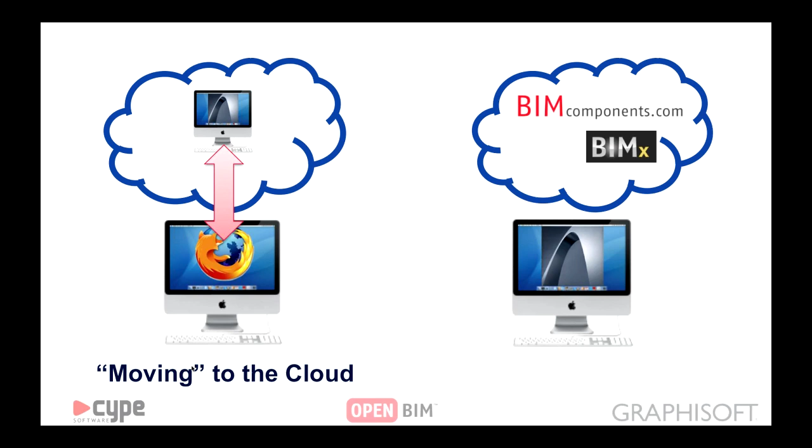So the way that we see things is a little bit differently. We see it as an ecosystem of solutions that need to be integrated and managed, that have to be easily accessible, and that have to be integrated in the different scenarios of work that we currently have.

We cannot assume that we're always going to be in our studio. We might need to be on the flow, on the move, we will have to be on site, we will have to be with clients, and this requires a lot more flexibility.

For that, we have Windows Azure as well as Microsoft Dynamics. This is going to help us manage all this information in a logical sense. And at the same time, all of this has to be integrated into all the mobile systems that we currently have available to us. So here it is, this is the screen.

So what we want to do is make sure that we fix the content issue with anybody, build a content market, because people can actually buy and sell, and obviously the different manufacturers can show their wares through this portal and build a community, which is important.

And at the end of the day it's really leveraging volume of scale. The reason for that is obviously the more that there is, the easier it is to find, the better it is for all. Again, collaboration is the main key here.

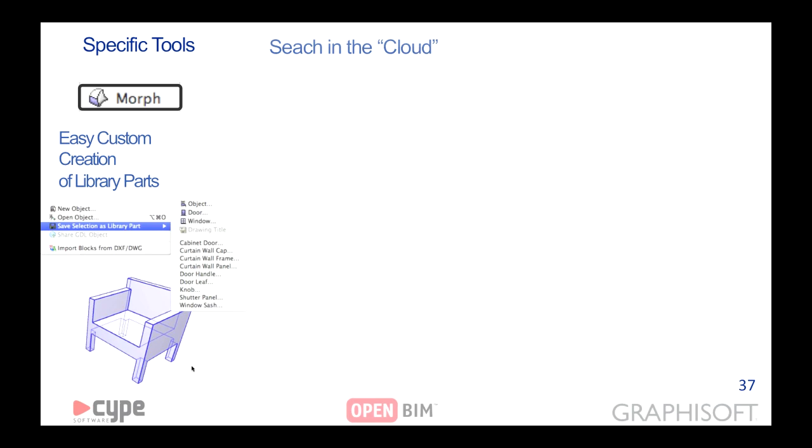In our case, we've produced the Morph tool that allows us to customize and create library parts. Relatively simple. We're then able to search in the cloud easily for the different kinds of elements that we require. And by the same token, the BIM portal allows us to search and download centrally, directly into our system.

So now we're going to have a look at the BIM Components demo. In this case, we're going to simply have a look at what was being done with that sofa that we had seen initially, and we're going to continue with the story of what happens once you've created that particular object.

Here we are. So in this object, we're simply going to start saving it as one. We created a morph, but that morph needs to be changed into an intelligent object. Here it is, it comes up. It simply allows us to do this. We give it a name. We're then able to expand information here so that we can put more info as we require.

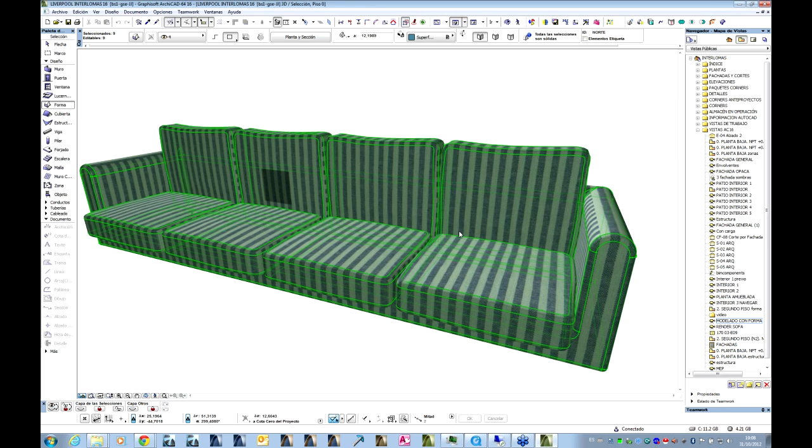It will then launch us into the interface so that we can select all kinds of things there in terms of materials, and we can then say who's done it, who's created it. We can put even passwords if we have to, should we want to have a sale.

We can use description codes, and we can use meta codes, if you like, so that it's easy to find or it's related to other elements, for example chairs and tables, or sofas and lamps, so that people can then put them together and select if they have to. And at the same time, because we did a render before, we can add an image to it so that it's easy to visualize when we select it.

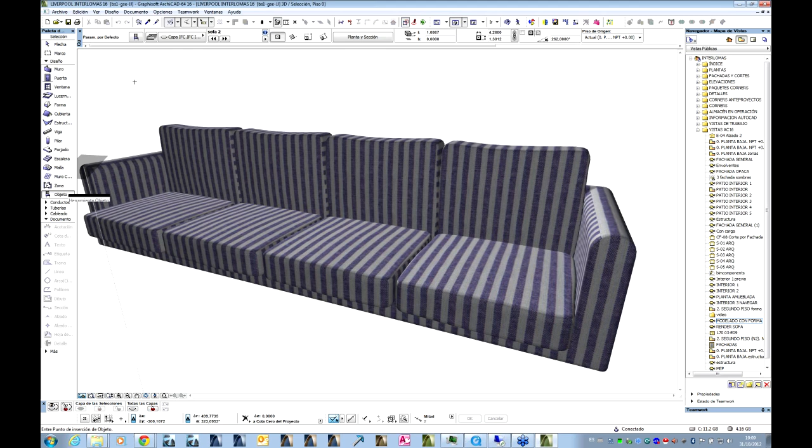So here we go, it's been saved. Now it's a part of our library. It's encrusted, which means that we are already able to use it all over the place. Should we have to modify it, we can continue modification with Morph. But here we are, we found it in our library as such.

As you can see, it has lots of different properties as well as intelligent elements, and it's going through all the ticks to ensure that it has all the information that we require. We can add more if we like to, depending on how we progress. It can be a simple object from the start, and then it can be added with manufacturing content, with life cycles, with all kinds of things.

That's why they're intelligent. Now we can search both internally within our library setup, as you can see there, or also outside in the system that we have, BIM Components. So we can have a search, and the search in this case is going to be just 'table' to make it easy. As you can see, we have those internal views from the libraries inside ArchiCAD, but those with the globe next to them...

Once we're downloading directly, they will become part of our project. That will in fact be part of our library setup and zipping it on. We can even explore the object once we're inside through the web, which we will show you in a second.

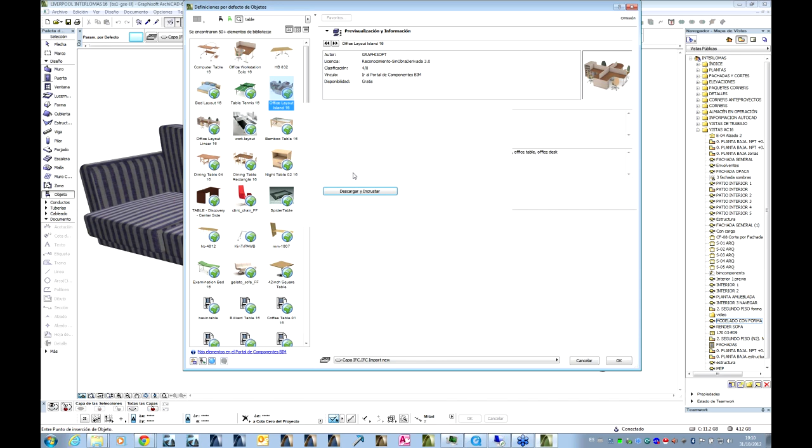So there you are, it's actually been downloading, and it's not that bad considering that we're going through the internet at this stage, as well as doing a live demo. But here we are, we have the actual elements with us. So it's quite clear, it's very easy to understand, and it falls into a very logical pattern of search, as well as being able to dispose of it or being able to use it.

All right, so now we're going to go into the web. Just with a web browser, we have access to the same portal, because we're not going to deny people outside the system to come in. Again, we believe in open BIM, and you're able to go in there again, search for table, just as an example. Anything that is associated to table, be that as it may, it will come up, even a bed, look at that.

But it's important to note that we're able to search through it, locate what we want, because then we can go by category, by manufacturing, by even types, or whatever furnishing that we want. Once we have located that element and we have the GDL adapter downloaded, we should be able to have a look at it directly on the internet.

As soon as it downloads a little bit, let's see how slow our internet connection is, but we can tweet it, we can take it onto Facebook, we can do all kinds of things. So you can see it here, right? So it's able to be looked at. We can actually even open it so we can see what's inside, who's the manufacturer, how much it costs, all kinds of things.

This is excellent because producing a project, as we were told by Liverpool, is not just making the building, it's also running it later and making sure that this rich information is linked to management systems, be that SAP, ERP, and the other. So it's good to see that information flow is going to be clear.

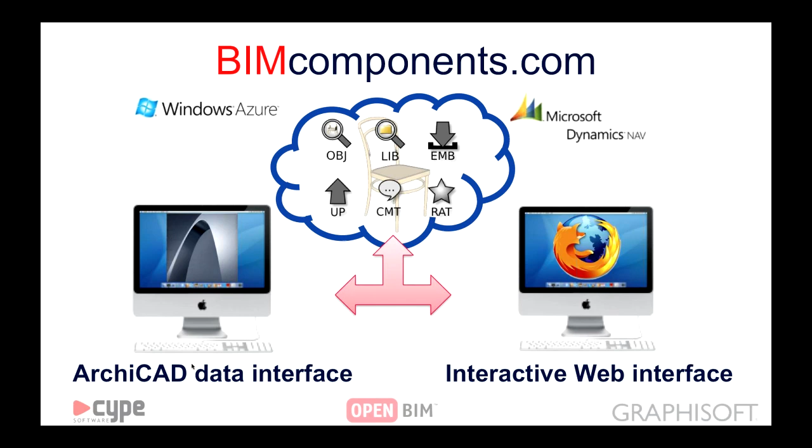Beyond that, we're able to then see that the solutions ecosystem that completes the flow of information in BIM is quite clear from the Graphisoft point of view. We're able to bring you any kind of tools within the Windows and Mac environment. We definitely see that the BIM server is a major plus because we're able to share and work together across continents without anything stopping us in terms of geography.

ArchiCAD 16 now has incorporated initial energy analysis for any kind of building. If you want to go beyond that later on, much like CYPE is doing by sectorizing and doing compartments and even bridging thermal bridges and the like, you can then use Eco Designer Star. That should be coming out very soon.

We have a pre-established system for MEP within ArchiCAD that you can actually model and then send to the engineer for checking. And as you have seen, ArchiCAD also has a fairly wide range of structural elements that we can use to create our pre-study of our building and then have that checked by the engineers.

To show all of this, we're able to take it into the BIMx. BIMx is capable of using a very small file that can be self-executable both in Mac as well as Windows, but most importantly, all of this is accessible to us through the mobile systems we currently have for Microsoft, for iOS, as well as for the Google setup we have, the Android systems.

So we're able to put all of that together. We're able to push it up and down into the cloud through bimcomponents.com. We can then even interact with social media, with Twitter as well as Facebook, and able to exchange or go beyond the limits of our study towards what's out there.